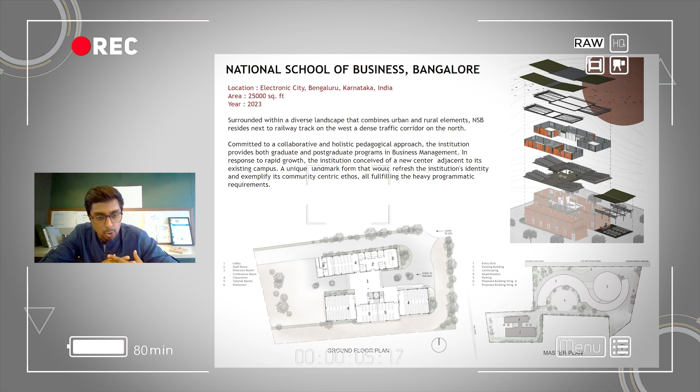We work with architecture which is not a double banked but a single banked structure, where you have the central split or the central space between the two built formats. What we did realize is that there is a great potential, especially amongst the local people, to build with mud. So the idea of us to go back to load bearing structures was a way to understand how construction was done in the past, and how a lot of these load bearing structures stand the test of time even today.

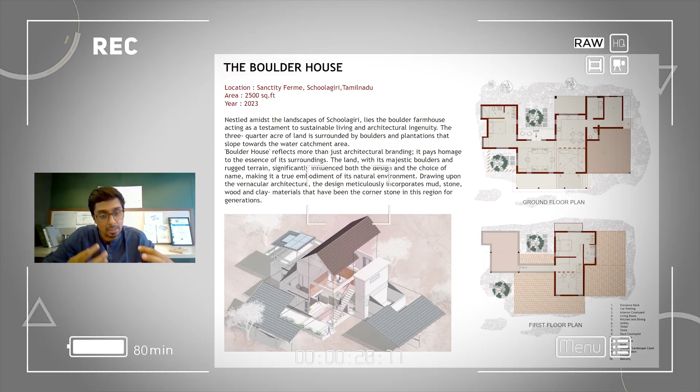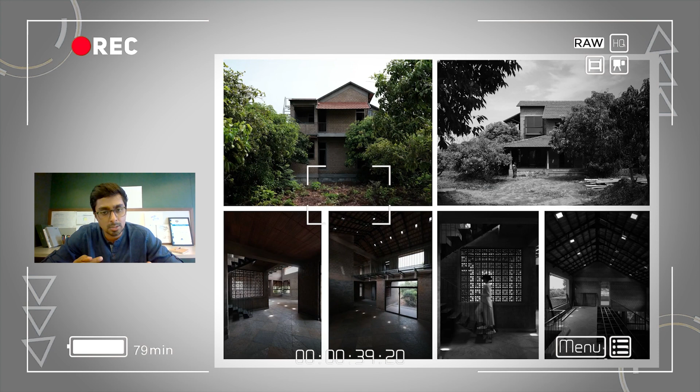So it's not the build, but it's the fact that we were able to collaborate with a series of people forming a great community, which is essentially what this piece of architecture is. Our projects at the stage of completion or towards the stage of completion, where we look at it purely from an architectural point of view.

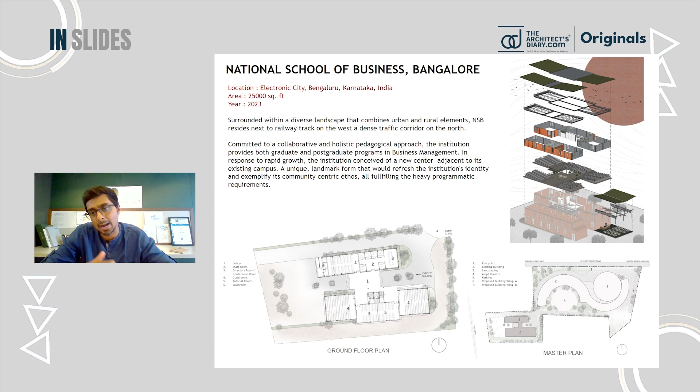And if you look at the exploded image on the right hand side top, this is essentially keeping aside a plan that also allows us to expand the entire structure in the future. So we've actually started on the expansion part of the project, and we've got both the documented part of the project before the extension and also what is going on as work in progress right now. Yeah.

So essentially, some of these pictures that you see displayed over here are the two wings, right? And these are cut by a central spine, and the central spine essentially has a couple of bridges which are connected at various levels, and it's completely distinguished by a sort of courtyard or walk spine that splits across both the buildings.

Now, also due to the setback constraints and the size of the site, the buildings essentially touch the setback lines, and all around the building we've left about an 8-meter road width for a fire tender. So essentially, we don't have that flexibility to move beyond this.

So that was a way for us to understand how we could adapt the entire design as per the constraints of the site, and try and see how we could navigate through these built spaces by not trying to overbuild, just trying to keep a very very simple built form.

So as you see, this is just a ground plus one structure at present, and what we've done is essentially wrap this entire building with a brick skin, right? And this brick skin essentially helps in keeping the thermal insulation of the classrooms and the other faculty spaces pretty comfortable across various weather cycles. And apart from that, it also helps in reducing the dependence on artificial forms of air conditioning, especially.

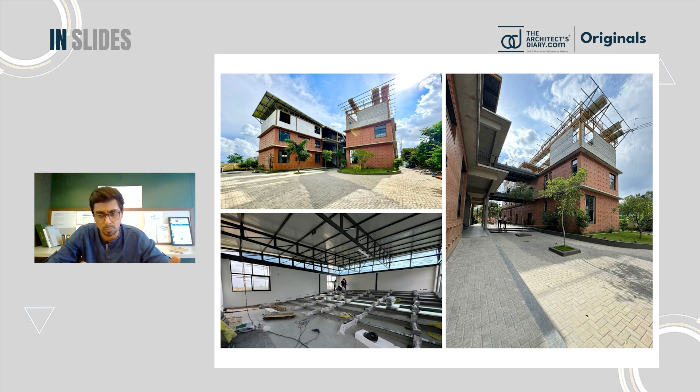And what you see essentially inside the classrooms would be simple, clean, crisp white walls with a floating roof, and the clerestory lighting that can bring in as much natural lighting. These clerestories also have a ventilation buffer, so this also allows for natural lighting and ventilation inside these classrooms. And of course all these classrooms have raked seating formats, as you see.

These are snippets of some more work that's ongoing here. So on the left hand side, you see the structure being completed on the outside, and we're just keeping very simple, clean plaster textures on the top, so that the brick is highlighted only at the lower levels. And what you see at the back over here is an extension where we've thought of keeping a small little cafeteria and a coffee shop as an extension of the academic block.

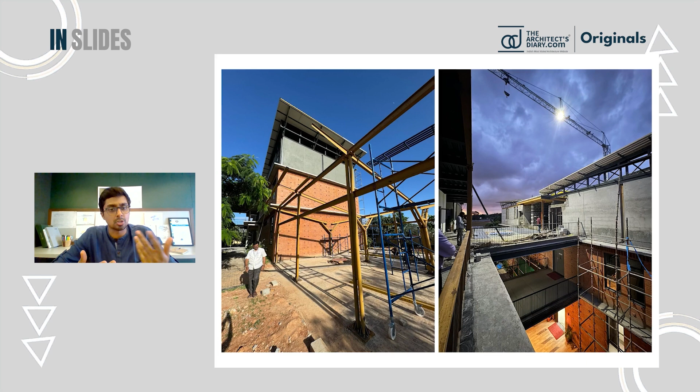So again, some of these work in progress images that you see over here. So we've entirely used cranes to assemble this framework on top of the existing massing, and then do the walls as infills, and then create this structure in a very very short time span. So we are essentially just about another 10 to 15 days away from handover.

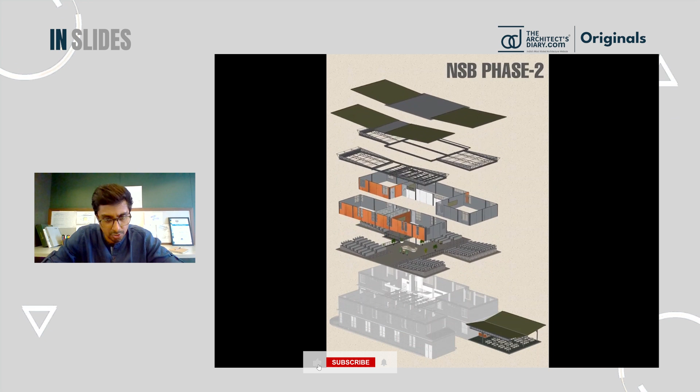So this is just an illustration. We work a lot with illustrations. So this is a way of understanding how we intervene with our structures, and how essentially we look at putting something one on top of the other, considering the scope and the possibility of future expansion, how this essentially sits on top of the existing structure.

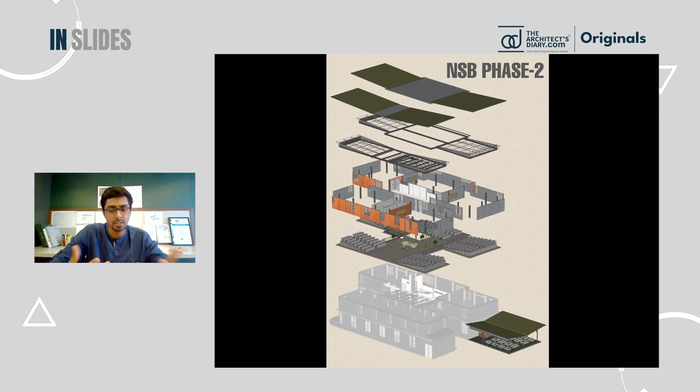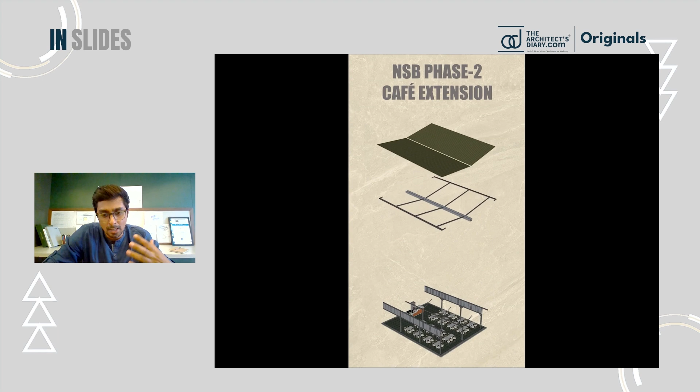And we've just got a small animation of the cafeteria extension as well. So this, as you see, is essentially the extension of the cafeteria right behind the building.

So now we'll come to the next project. This is the Boulder House. This is located in Shoolagiri, and this also was featured on the Architects Diary, apart from some of the other publications that we sent the project to. This is a very simple farmhouse, right? It's located in the hinterlands of Shoolagiri, and essentially part of a hot and dry climate.

So the only way that we could look at intervening on these spaces was essentially trying to build with what is already available, or what is rather contextually and locally available to us, right? And since it is a place which is slightly remote and not exactly accessible to the main areas of Shoolagiri, or even close to the national highway, we had certain restrictions of trying to see what kind of resources we could bring in order to bring this project together.

So essentially this was achievable through building communities, working with people across the precinct and local villages around the area. And what we did realize is that there is a great potential, especially amongst the local people, to build with mud, and the availability of good quality mud in this region was also a deciding factor for us to try and build with what is on the site.

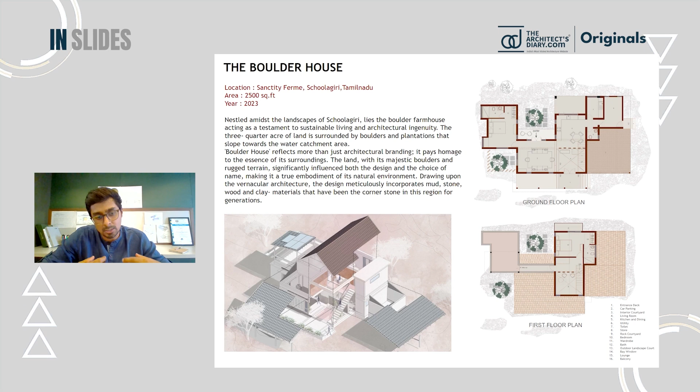And this structure is essentially load bearing. So the idea of us going back to load bearing structures was a way to understand how construction was done in the past, and how a lot of these load bearing structures stand the test of time even today. So if you were to look at it, load bearing structures essentially have a lot of potential, and have that longevity as far as building construction techniques go in today's day and age, right?

So this is just a sort of take for us to try and create something which is a little modern, yet takes references from the vernacular architecture that is in and around the local areas and the vicinities.

It's also a way to try and see how craftsmanship and the relevance of using mud as an art, or as a form of architecture, applies in today's day and age, where it's very difficult to get workmen to execute these kind of built spaces. We feel proud that it's not just the built form, but the fact that we were able to collaborate with a series of people forming a great community, which is essentially what this piece of architecture is based upon.

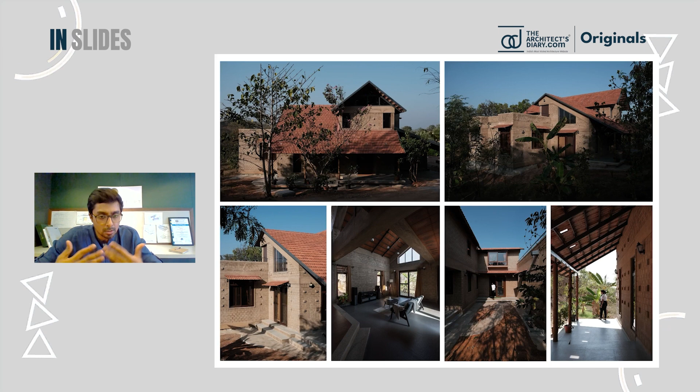Looking at some of these frames, it's all about trying to blend in with the context. From a climatic point of view, I think we've been able to bring this reasonably well together, and relatively sustainable in terms of trying to build as naturally as possible. One thing for sure is a space like this is very comfortable.

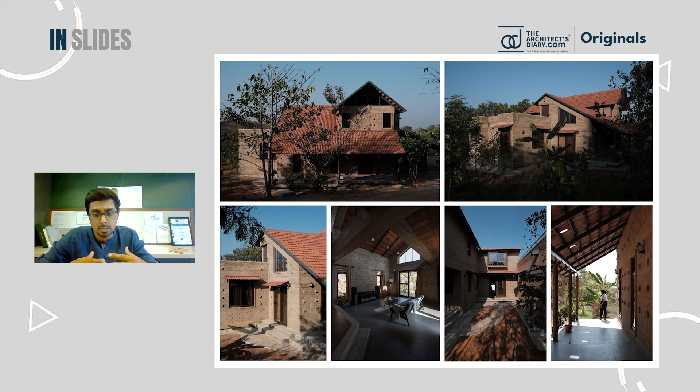It's very cool, especially in a place that is exposed to hot and dry climate. So again, some of these photographs show that we are relatively big on light and ventilation. We document our projects with an understanding of the orientation of the sun path, and we try to open out our architecture very strategically, trying to maximize the amount of daylight during the day while also capitalizing on the ventilation aspect.

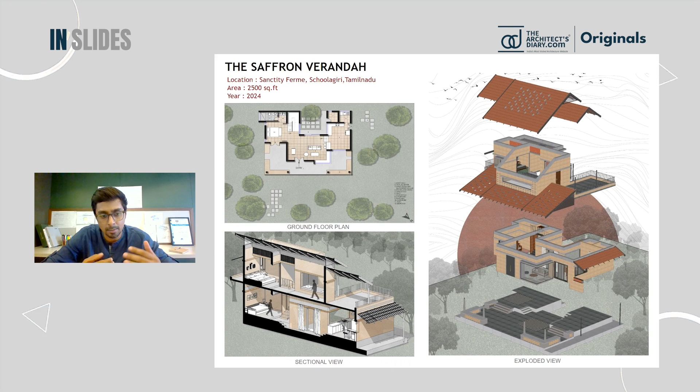So we've tried to build what is essentially available to us and what is around us, again using mud from the site—compressed stabilized earth blocks, with Bangalore tile roofs to keep the roofs relatively cool and comfortable. We've also tried to create a series of volumes using the illustrations on the slide. These volumetric analyses generally help us visualize what kind of spaces we require, and how this helps with lighting, ventilation, and essentially planning out spaces the way they need to be.

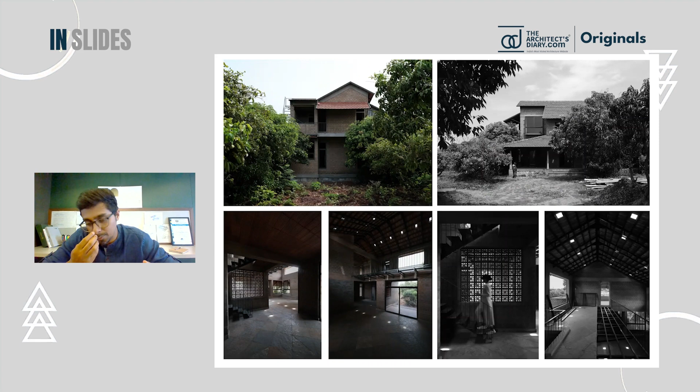Some of these photographs are essentially work in progress, as this project has almost come to a close. If you look at some of these photos, we've essentially launched a series called Raw, part of our Instagram page. We like to shoot our projects at the stage of completion, or towards it, where we look at it purely from an architectural point of view—no furniture, no drapes, curtains, or other soft furnishing. It's all about understanding the textures, the material, and the spatial understanding and volumes.

So this is essentially for us a way to celebrate the architecture that we've created across the years of developing this project and trying to mold this ground up from the site itself.

If you see the image on the top right, you'll notice that the entire plinth and foundation has been built using random rubble masonry or random rubble stone. This is essentially sourced from granite quarries in the nearby regions, and a lot of the waste generated in these quarries is transported here and repurposed.

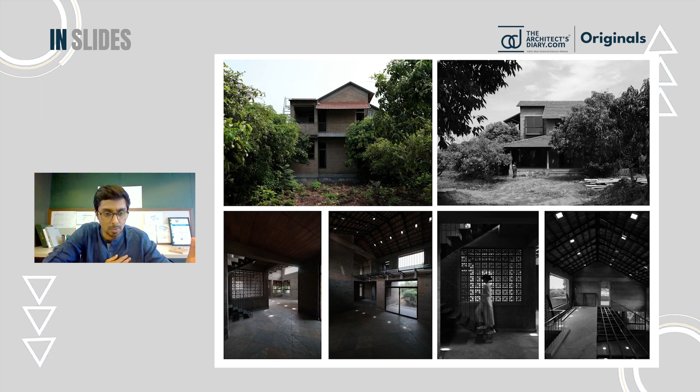This is a load bearing structure, just like the boulder farmhouse. We've also made use of old traditional pillars from the Karaikudi region. If you can see this frame, we've got some of these pillars brought in, and all of them are over a century old.

These are pillars that have stood the test of time. In places where old Chettinad architecture is being broken down for newer commercial buildings, we try to see how much value we can take from there and bring it to our sites, repurposing it as part of our architectural interventions.

Again, this frame shows the relation between what's built on the outside. There are two people standing on the frame outside, showing how the inside space has multiple volumes and how it responds to the volumes on the outside.

This is another farmhouse of ours, known as the hillside farmhouse, essentially very close by to the Saffron Veranda. It's slightly differently planned—a very open sort of plan that's been created, and again similarly built.

A lot of these projects that we take up in the region of Shoolagiri and Krishnagiri are essentially built out of mud. The reason is understanding what is available in and around the context—we've always tried to utilize as much context as possible, which is why we end up doing a lot of earth related construction in projects in this particular region.

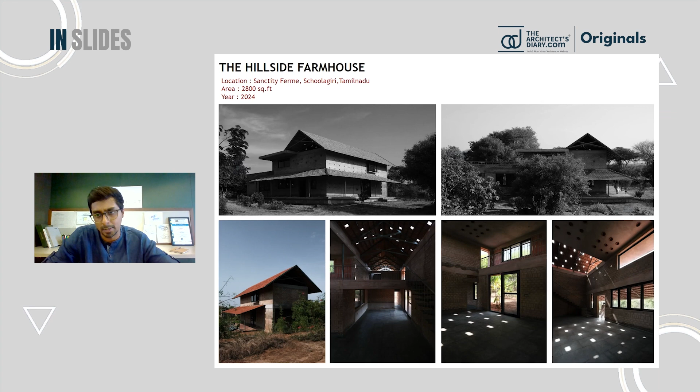So the next one we're doing is another farmhouse in the hinterlands of Denkanikottai, again surrounded by a slight hillock, in a hot and dry region, in the slightly remote parts of Tamil Nadu.

Here, what we've tried to work with is again various volumes, and again trying this exercise of breaking down some of these volumes to see how we can accommodate various spaces.

So most of the plans that we do for farms are open plan layouts. We try to build with very minimal or next to no internal walls anywhere as far as possible in designing these spaces.

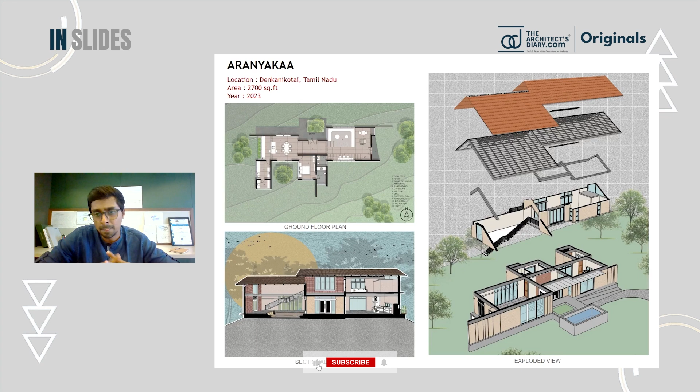The understanding of creating volumes across various heights is only for the sake of ventilation and lighting—ventilation so we can use the stack effect wherever possible and take out the hot air. In these hot and dry parts of Tamil Nadu, we try to avoid using RCC as much as possible, considering we'd like to cut down the amount of heat gain inside the structure.

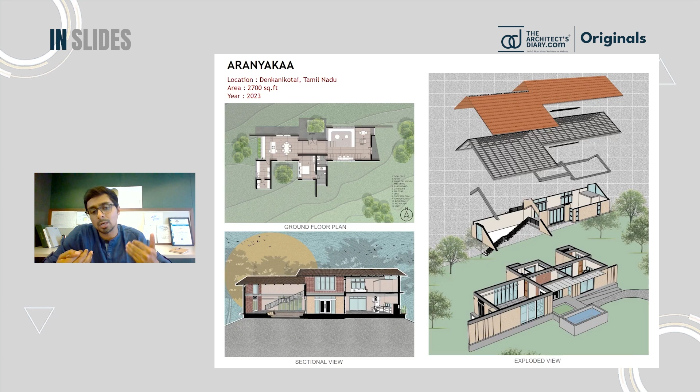This is another one we're doing at the foothills of Nandi, known as Krishna Kuteera. This is based on trying to understand the traditional take of the Guttu Mane in Mangalore, essentially southern Karnataka. Our clients are based out of Udupi, and we've tried to bring in some elements of the Guttu Mane, or the architecture repurposed from that part of Udupi, into the region of Nandi Hills.

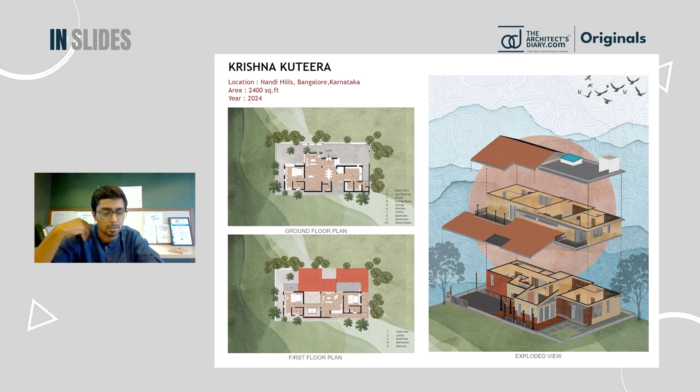This is also another work in progress, an ongoing project that has almost come close to completion—a weekend home of about 2,400 square feet. We've looked at creating this across seamless volumes, and through volumetric understanding of spaces, we've tried to use mud plaster and some amount of wire cut exposed brick wherever possible, to keep the entire structure as natural and earthy as possible.

It's just again a view of us trying to understand what kind of structure would be created upon assembling everything together. So again, work in progress. We will be releasing shoots and completed pictures of this project very soon, probably in the next 2-3 months, or early next year we'll be releasing some of these shots.

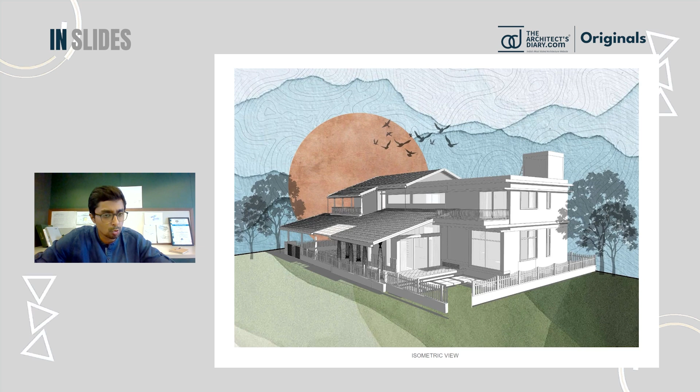So yeah, essentially these are some of the projects that we've been doing, Simran. So I think with this I would like to come to the end of my presentation. You could let me know if I would need to continue sharing the screen, or if I could close the screen. Yeah, you can close the screen, no issues.

So I hope this was hopefully insightful. Yes, it was a really wonderful presentation. I mean, I love the way you play with the volumes in your projects. The way the natural light comes inside, it's really beautiful to look at, and I think the users get to experience a space which they look for. I think whenever it's either a weekend home or maybe their residence, I think this is what the clients want, at the end.

So essentially, I think the challenge that we always find, Simran, is there are certain similarities or overlaps in our projects, and I'll tell you why. Because the reference always comes from one client through another, and essentially what ends up happening is we always tell our clients, a potential client rather, to go and see a space that we've designed previously. Many of them go or visit them, and very rarely they see them through photographs, but they actually do go and visit. So what ends up happening is they do like certain references, especially in terms of volumes that are generated. So it ends up that when it's working for someone else's project, please make it work for mine.

So there's always this sort of debate that we create, saying no, we want to do something a little more different, but then it ends up overlapping or coming back, only because this is something that's been working well, not just in terms of design, but also in terms of climate responsive architecture. So that is what people want at the end of the day. And what we've come to realize is that it's the end user's space, right? Definitely it's not something we want to fight over or argue over, because that is something they find comfort in, and if there's something they like from what they've seen before, then fair enough, that is something they want at the end of the day.